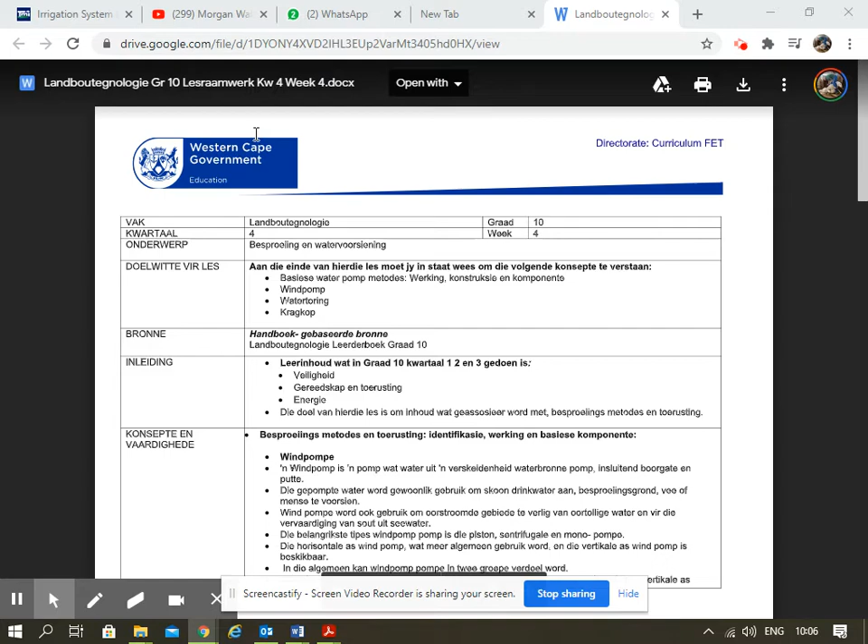Nou dit kom op die JOP's wat ek vir julle gestuur het, or in English the ATPs that we sent you, is the irrigation part. I helped create this one. It's nog 'n lekker enetjie to work with.

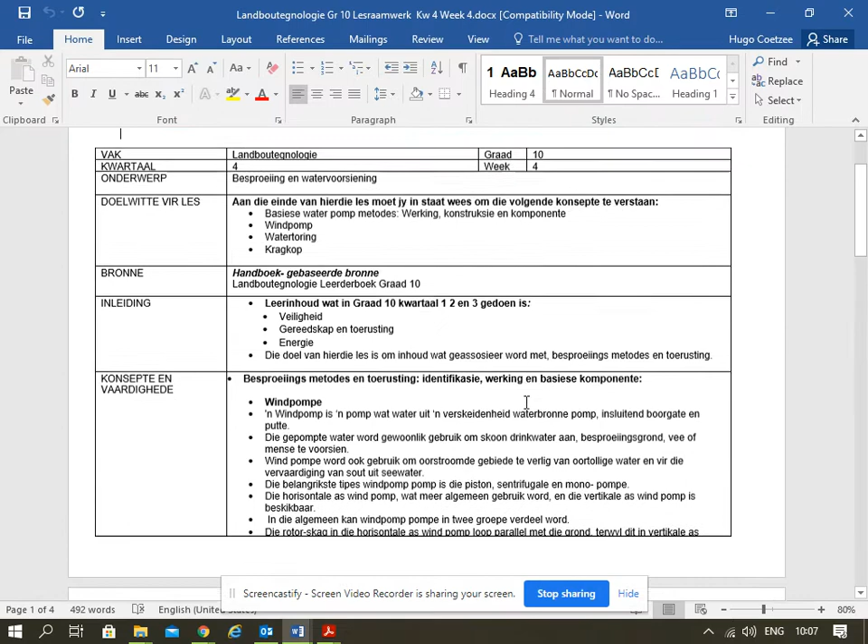So basic components for irrigation and equipment that we use.

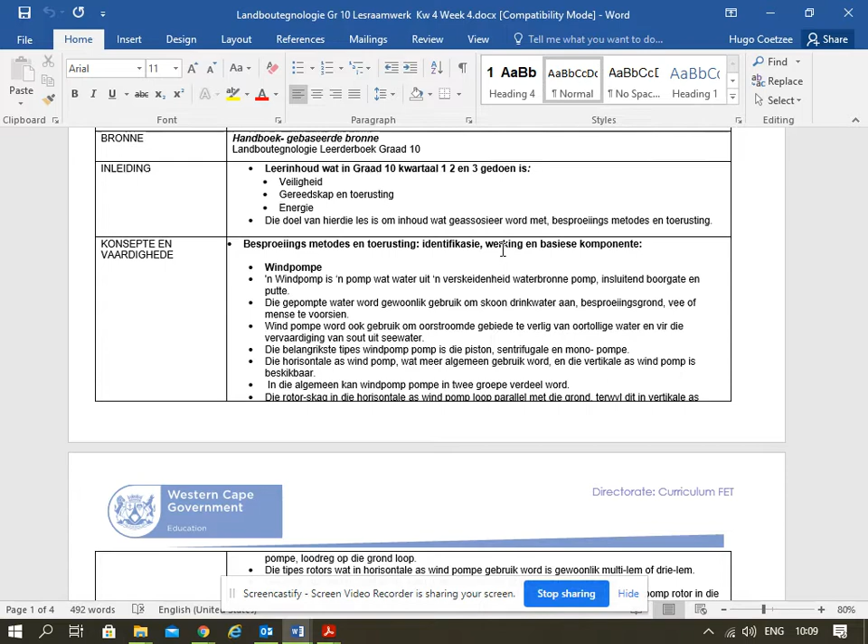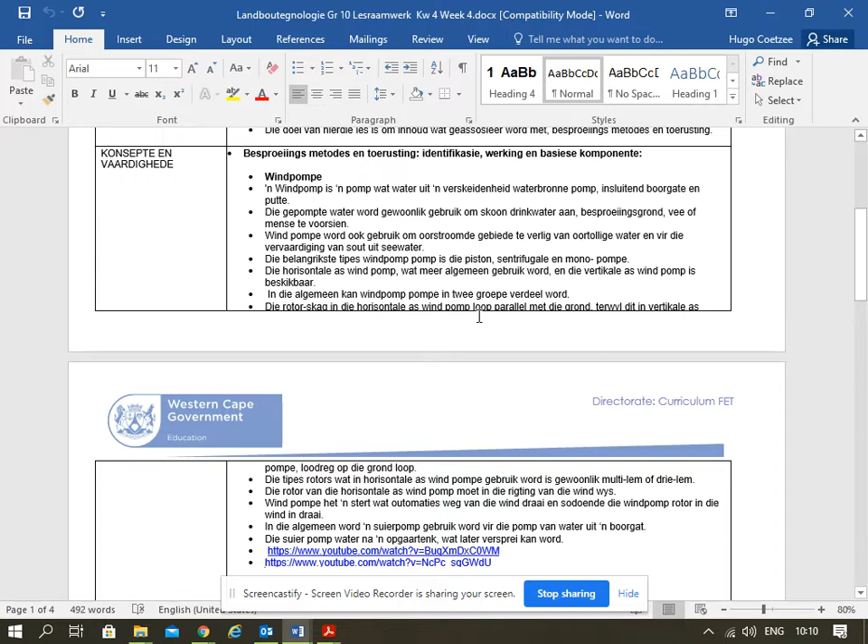So there's two types of windmills, one that goes horizontal and one that goes vertically.

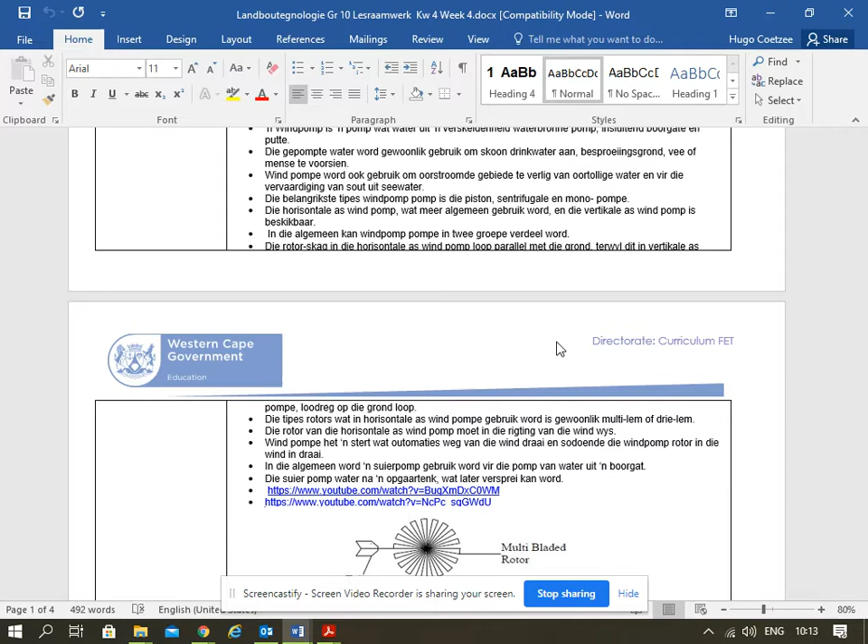So, we have a tail on a windmill that if the wind starts blowing onto the tail, it pushes the tail away, putting the blade into the wind.

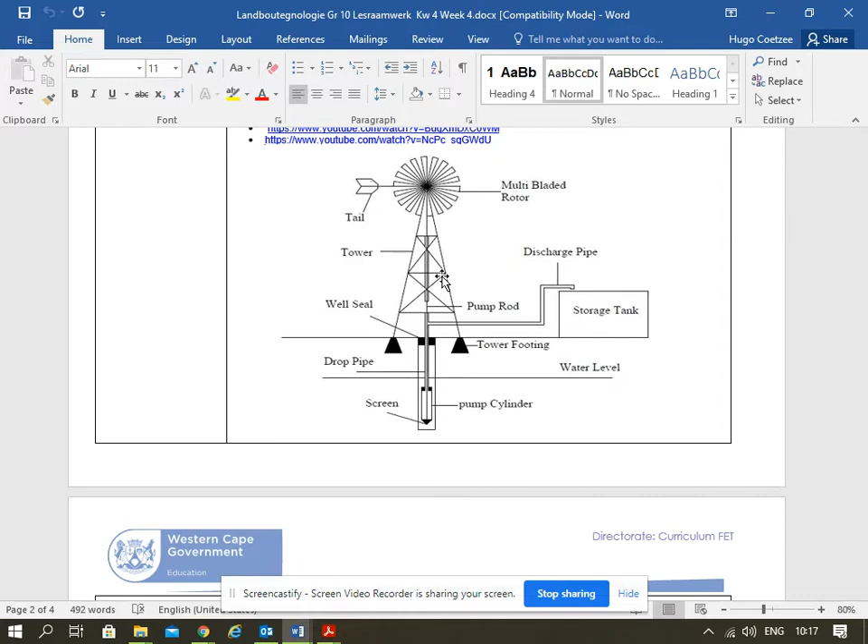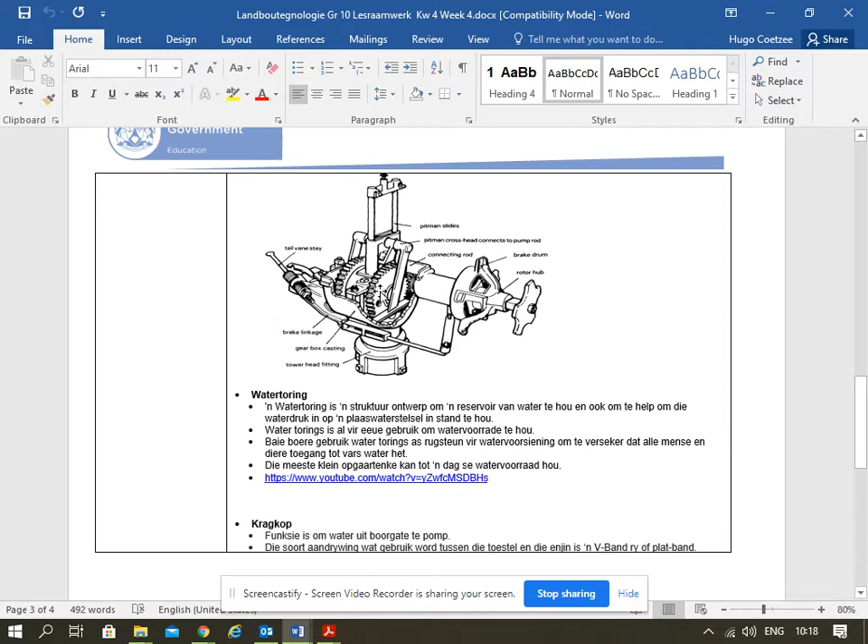There's the whole windmill system. That's how it works. The inside of the windmill.

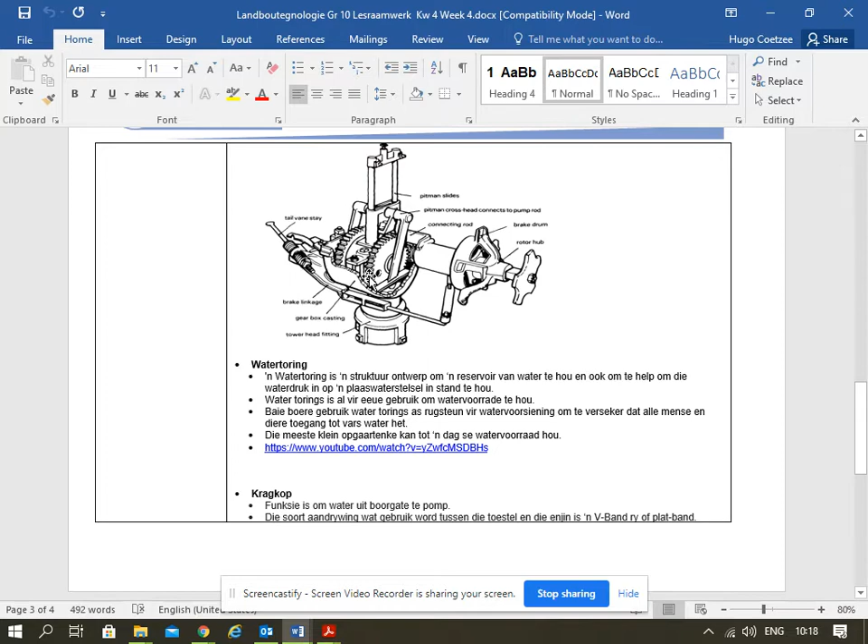Now, a water tower is basically built as a reservoir. It's usually very high up. But they have very small ones, right? It's like little reservoirs. You get little reservoirs, yes, but now a water tower's idea: if you're in a place where there's no water pressure, you have to use gravity. So if the water tower is 10 meters up, gravity will force that water down through the pipe to the other end.

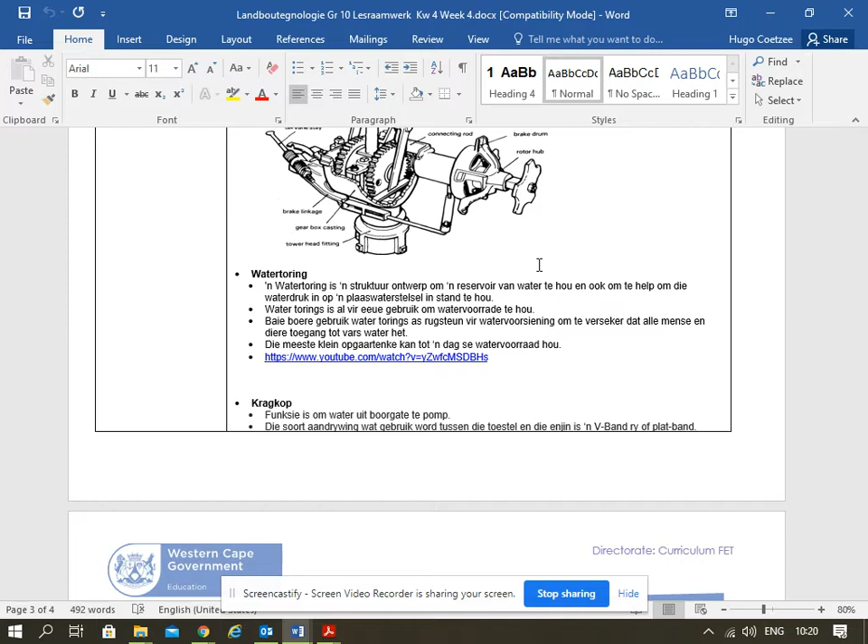So many of the small reservoir tanks, like the JoJo tanks, can have up to a day's water for a farm.

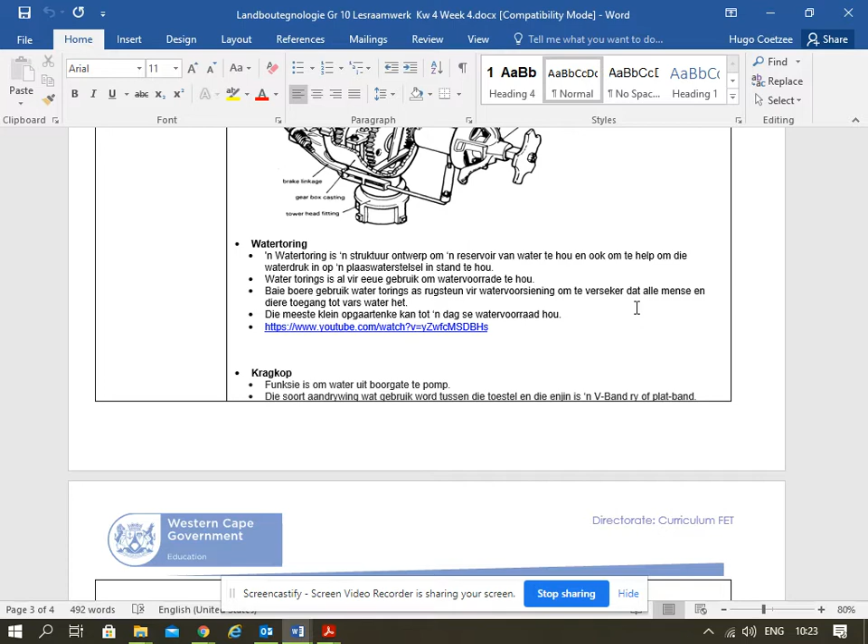So the kragkop, that pump that we use, is to get water from the borehole into the reservoir.

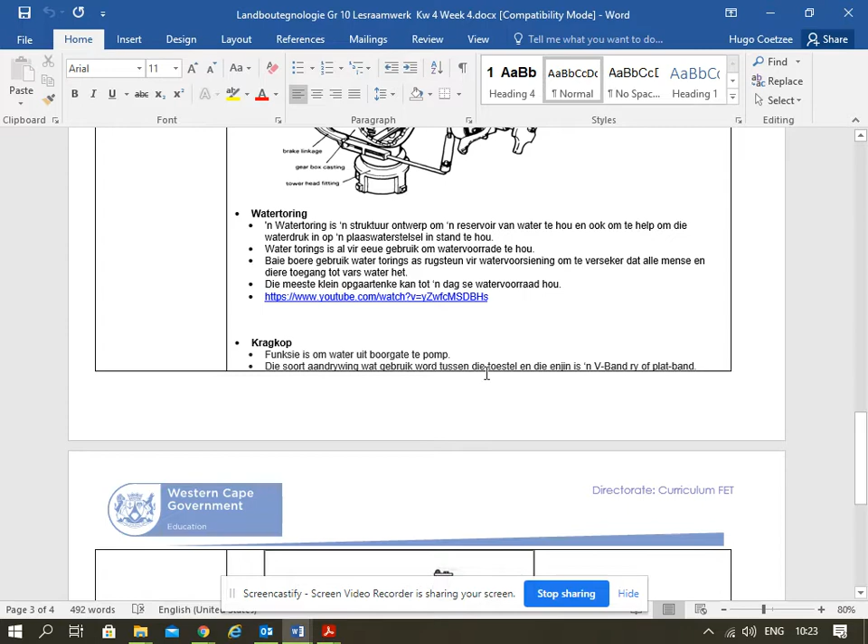And there is a picture of a kragkop. So there is the engine and there is the system. Arrow A shows the direction of rotation of the drive belt and arrow B shows the direction of rotation. So if A goes this way, B will be anti-clockwise. If A is clockwise, B will be anti-clockwise.

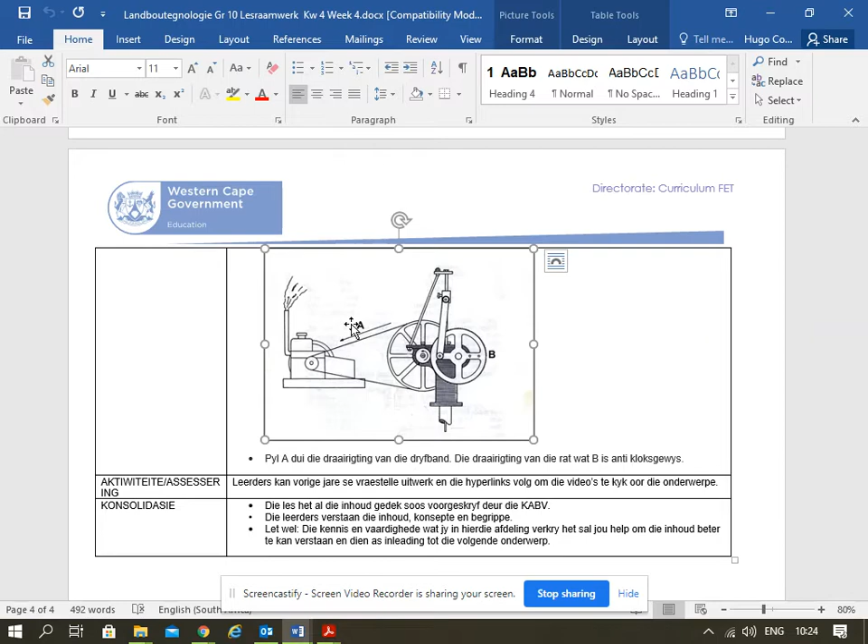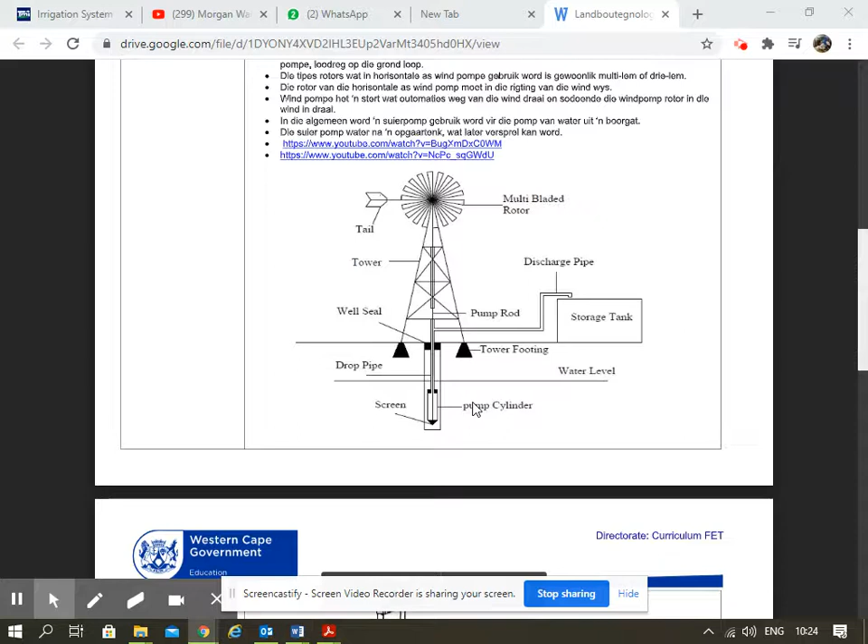Now every one of these ATP lessons has a hyperlink that you can click on that opens up a YouTube video that you can watch to explain more about our system.

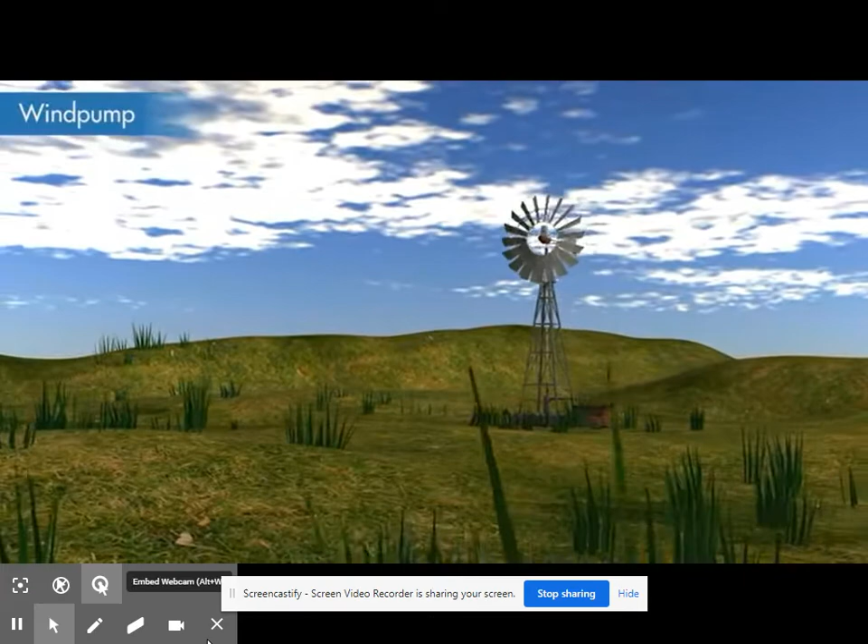A wind pump is a type of windmill which is used for pumping water. Hello viewers, this instructional video demonstrates the basic working mechanism of a multi-blade wind pump.

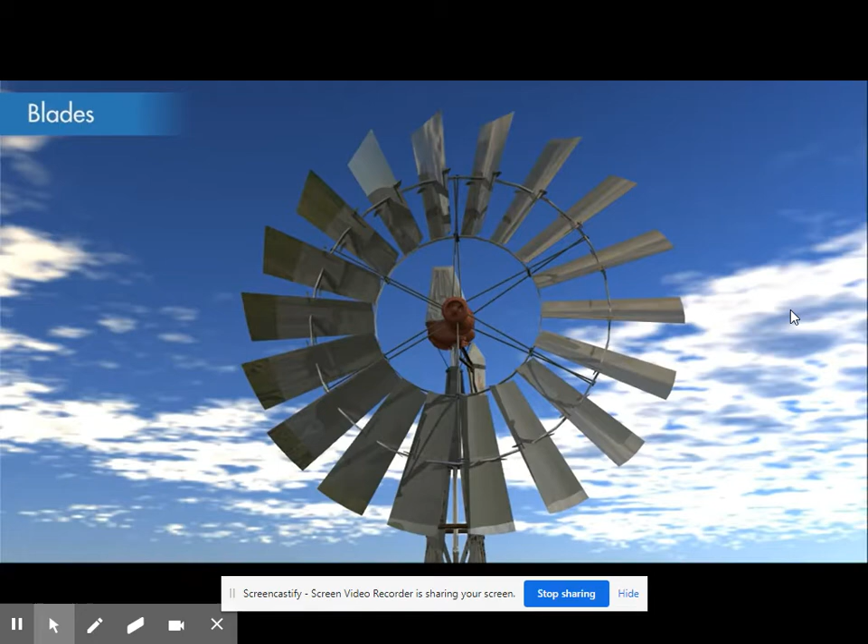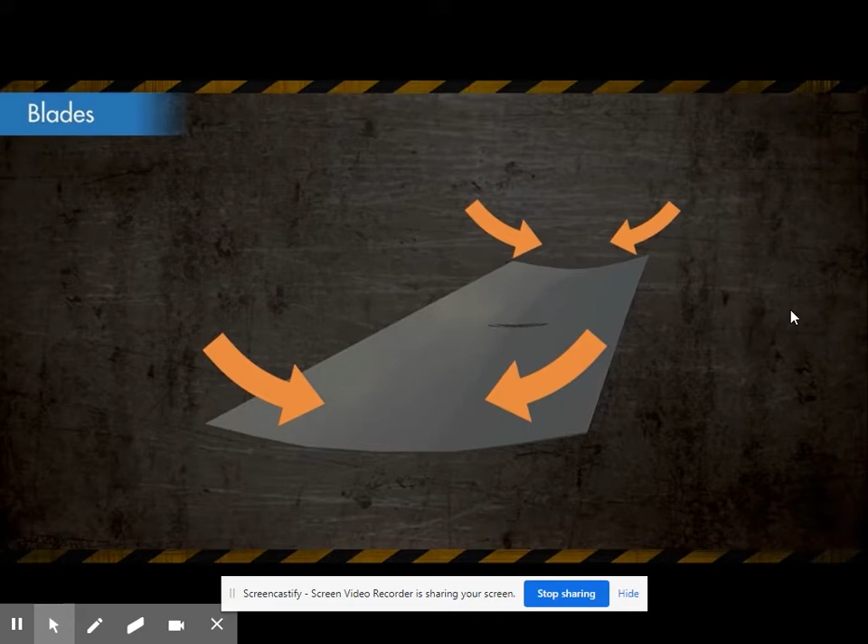Wind pumps are mainly comprised of 18 blades. The blades are slightly bent to an exact curvature to efficiently capture the wind.

A metal rib is fitted snugly to the blade and also has a tab that slots into the hole in the sail center, allowing the two sides to interlock. The metallic bands are fit through the ribs to assemble the sails together.

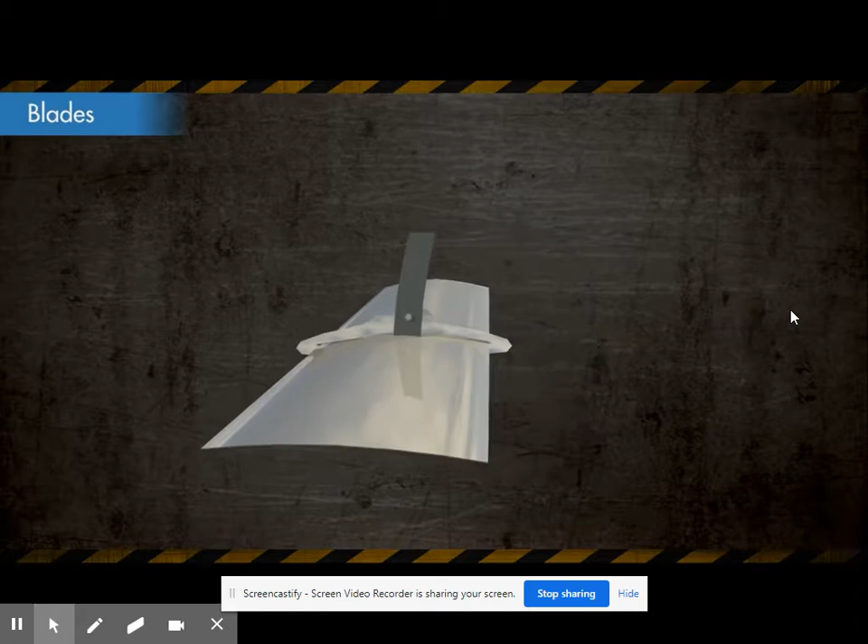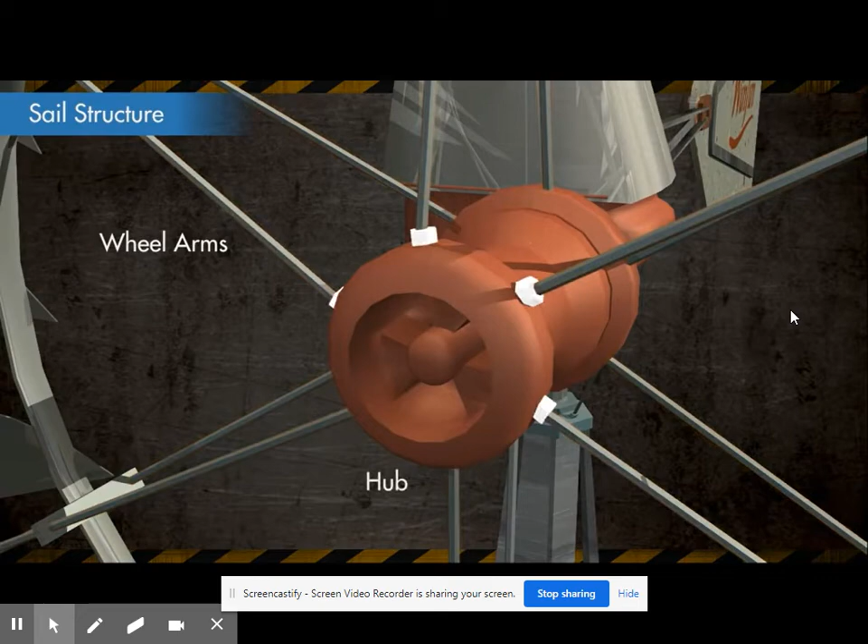The wheel arms that are screwed into the metallic hub hold the sails of the windmill. The sail structure is mounted on the wheel arms.

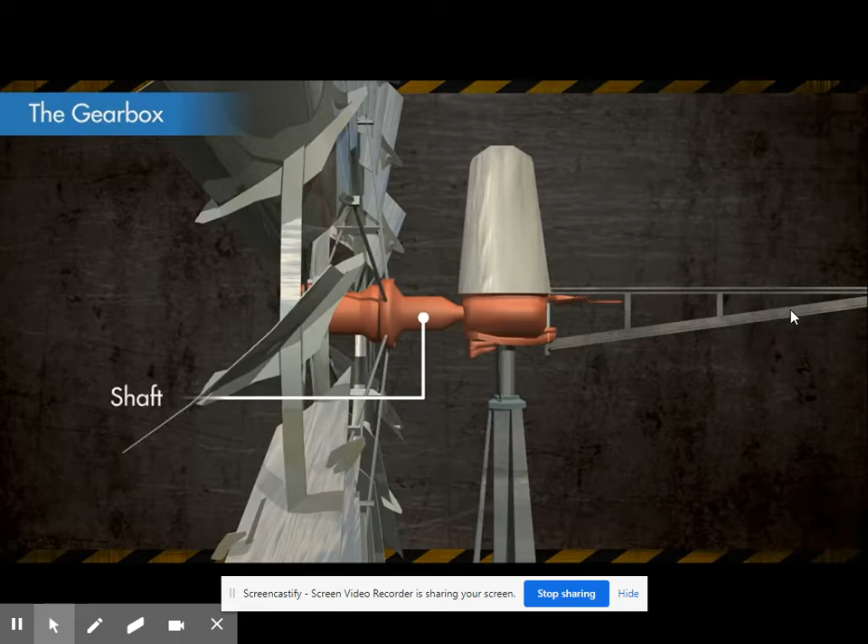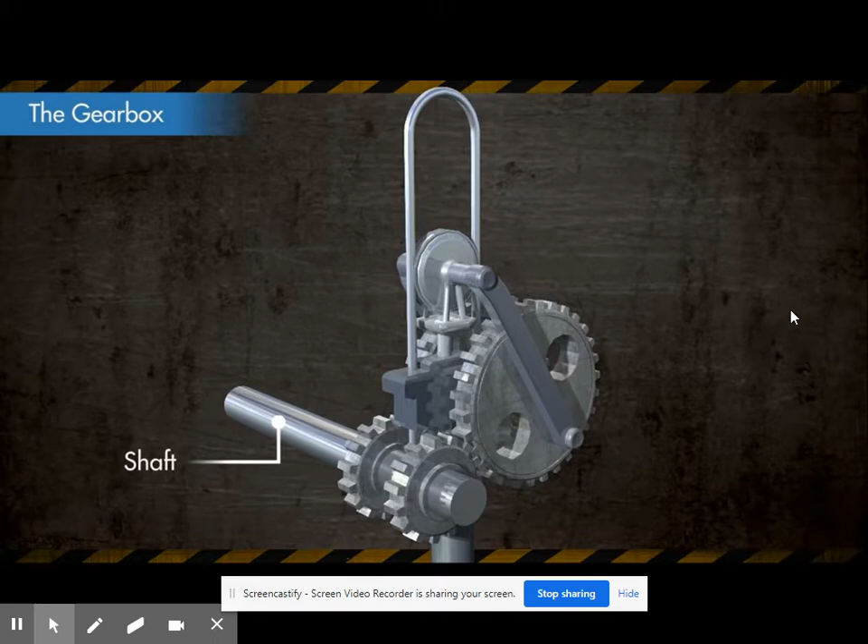The wheel hub is connected to a shaft that extends to the gearbox. The shaft, which is connected to the wheel hub, has two gears mounted on it in the gearbox.

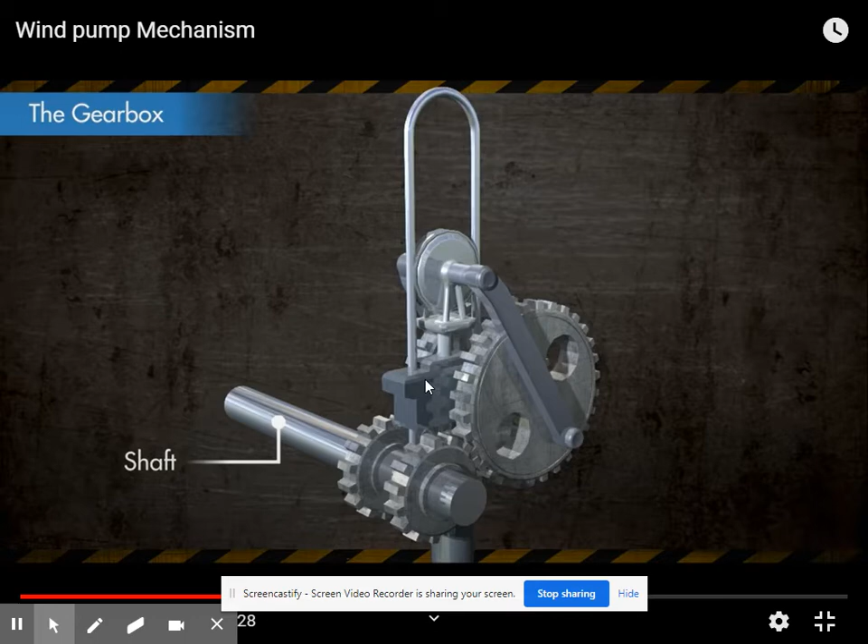As the gears rotate along the shaft, the bigger gears that are meshed to them rotate in the opposite direction.

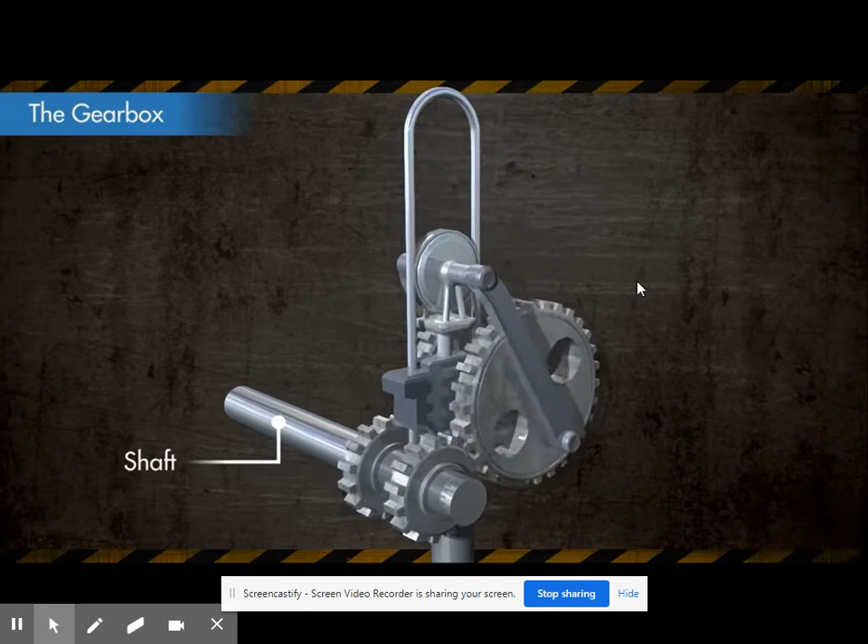The bigger gears are connected to a guide wheel by pitman arms.

The guide wheel is mounted on a pitman guide that allows it to slide up and down with the rotational motion of the connected gears.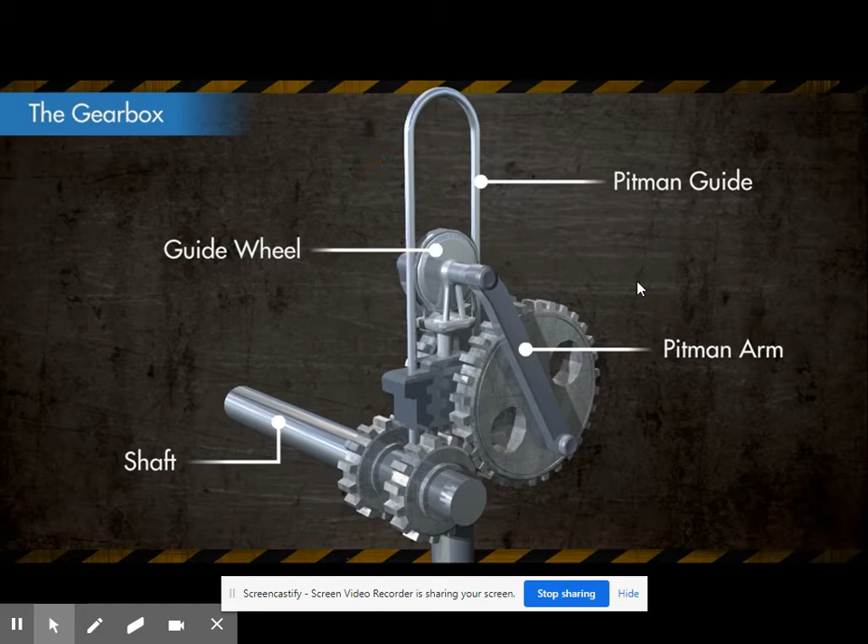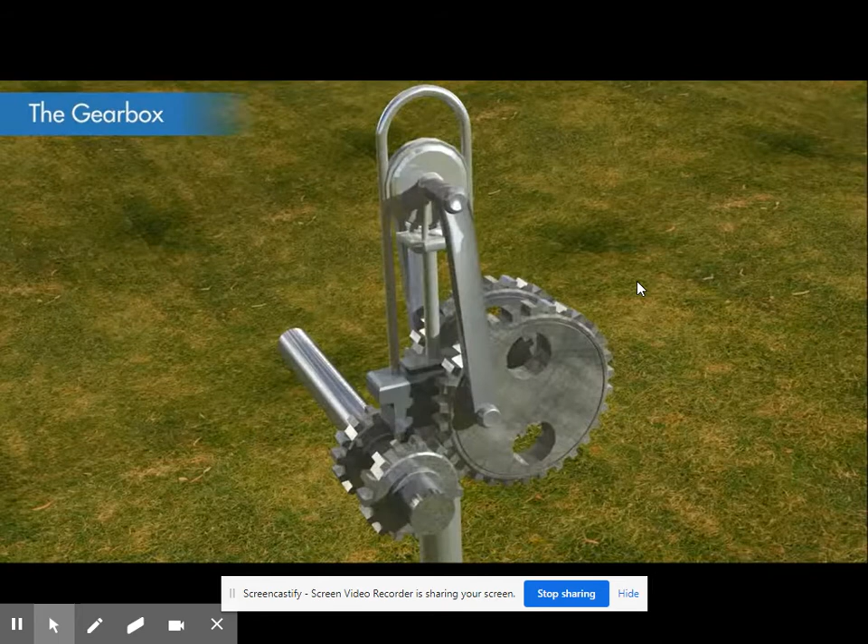The guide wheel is connected to a pump rod which is extended into the ground. The pump rod goes through a cylindrical drop pipe inside the ground.

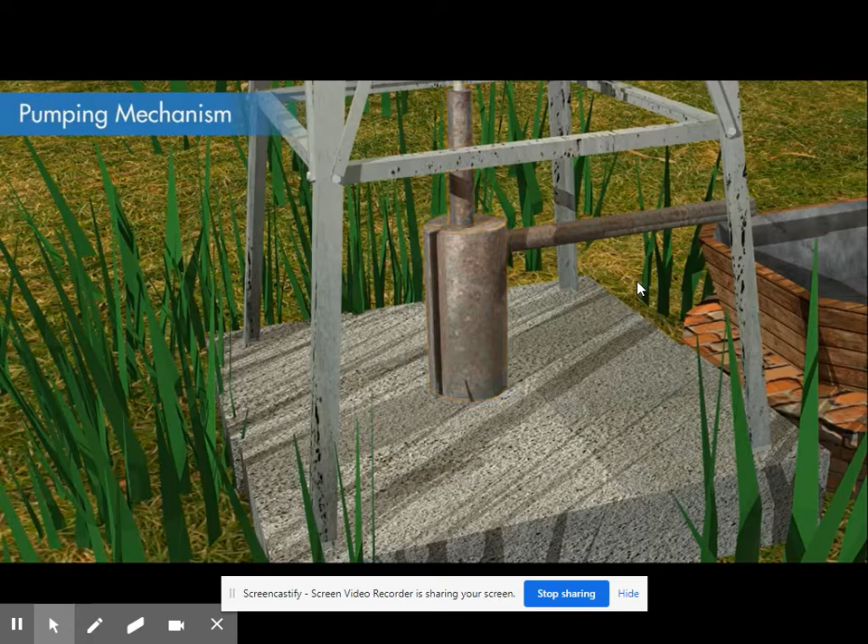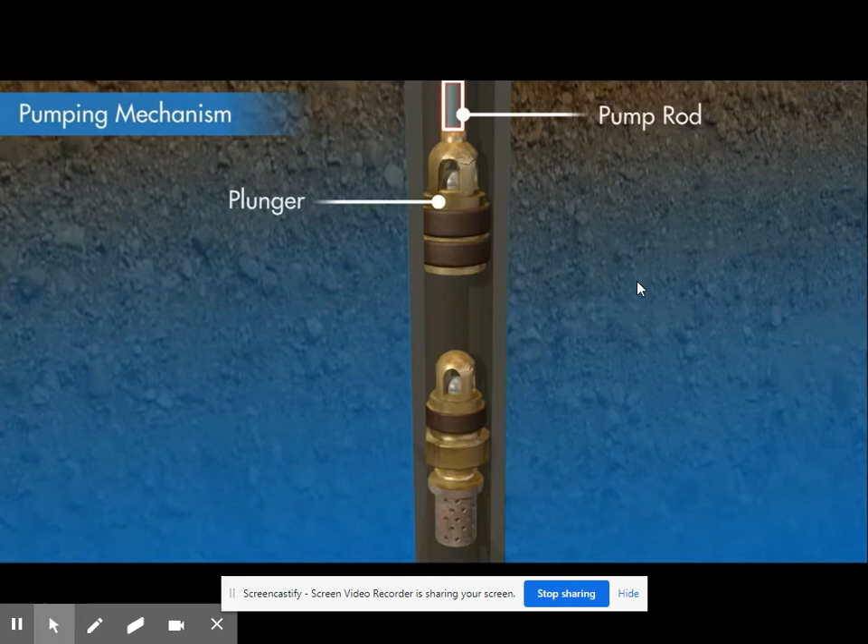The pump rod is connected to a plunger that acts like a piston and has leather cups to keep the plunger in direct contact with the cylindrical wall, and allows water to pass only through the valve when the plunger is making a downstroke.

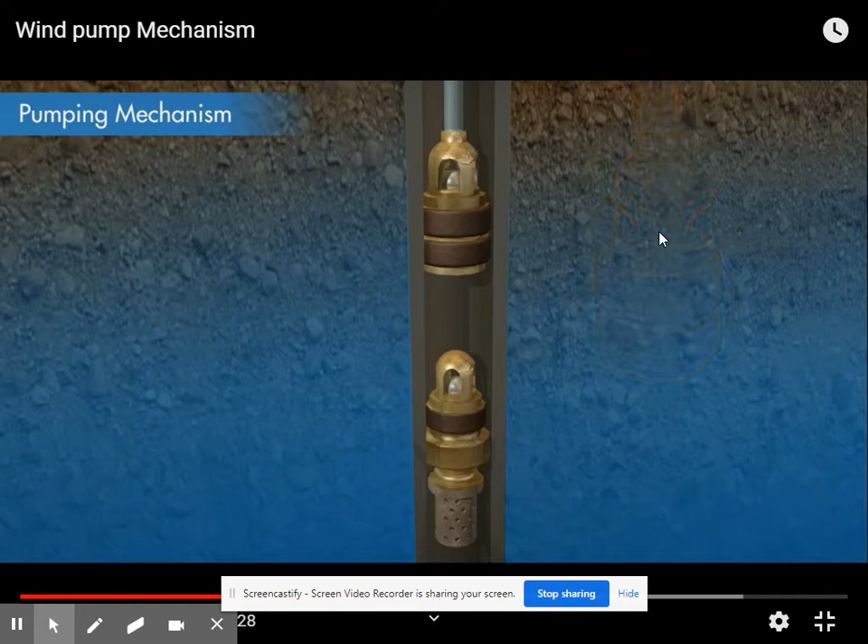There is a similar check valve at the bottom of the cylinder that is fitted to a strainer below the water level in the ground.

On a downstroke, water is held in the cylinder by a check valve and the plunger descends to the bottom, while the water passes through the plunger valve.

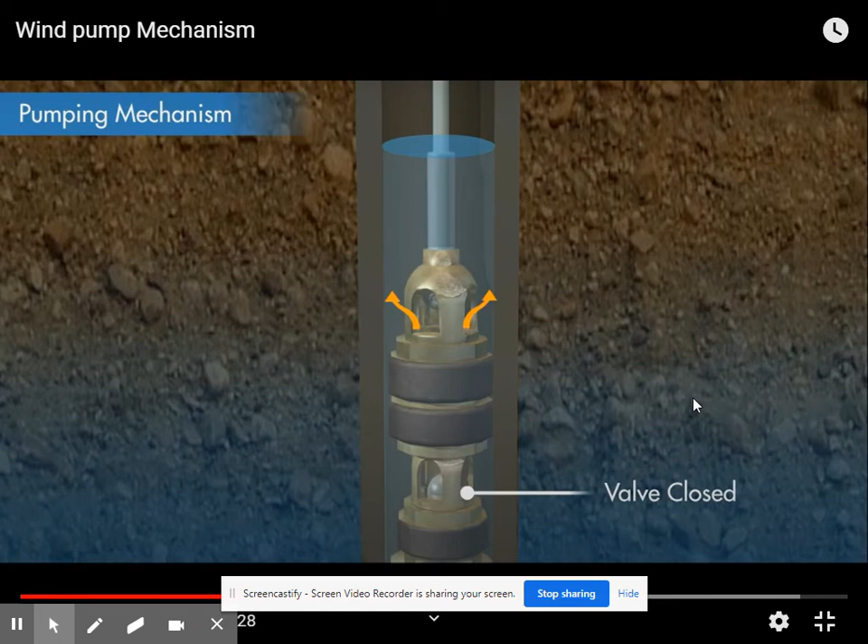Soos 'n basiese non-return valve. Die water kan nie terugloop nie. Water doesn't go back down, it only goes up.

The plunger forces a cylinder full of water into the drop pipe.

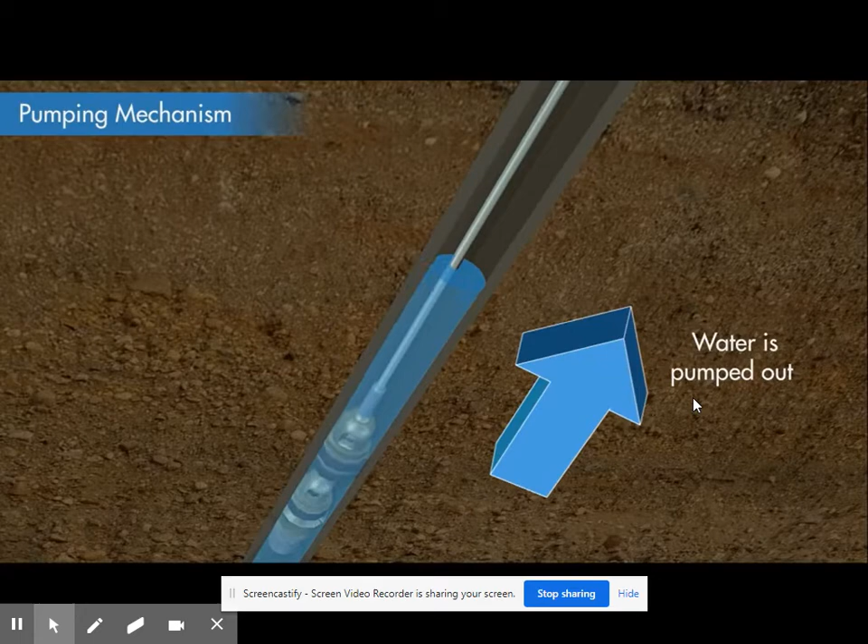And out to discharge tank, hence pumping the water out.

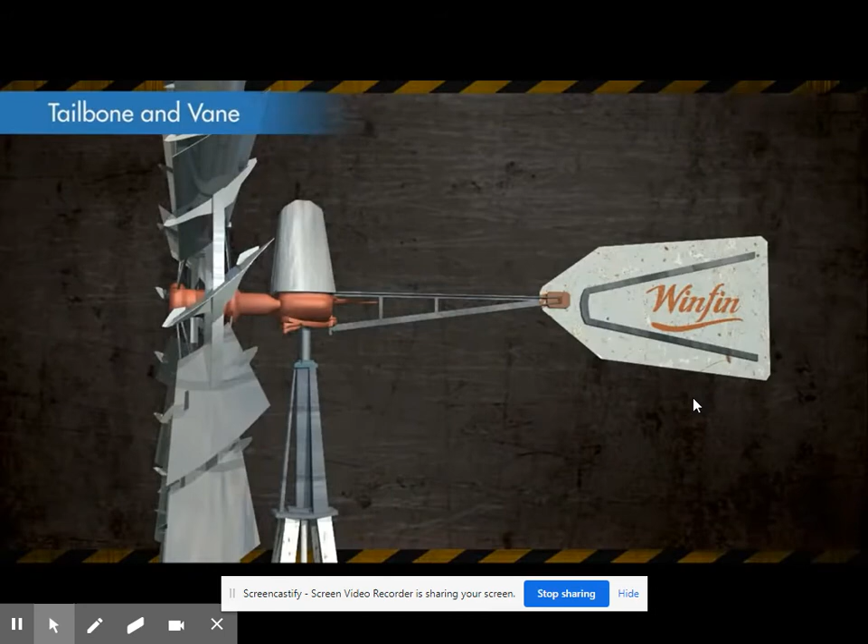The gearbox is mounted on a mast pipe and is also connected to a tailbone on which the vane is bolted.

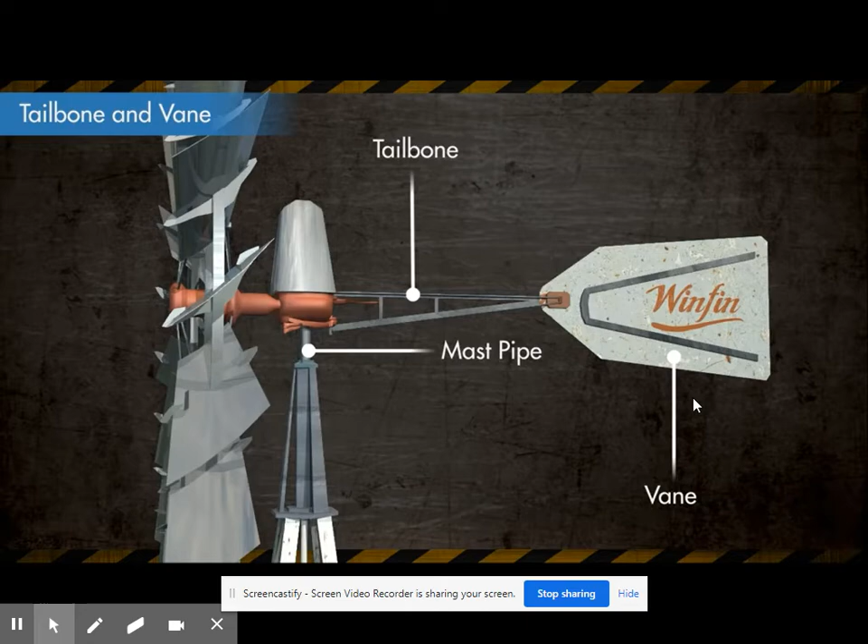The entire mill can revolve on the mast pipe, and the vane changes the direction of the mill according to the wind direction.

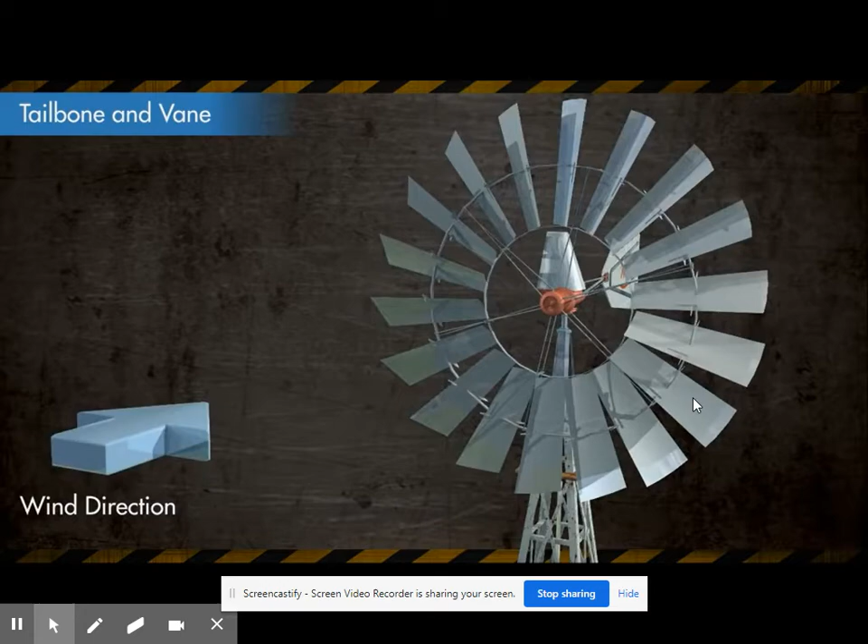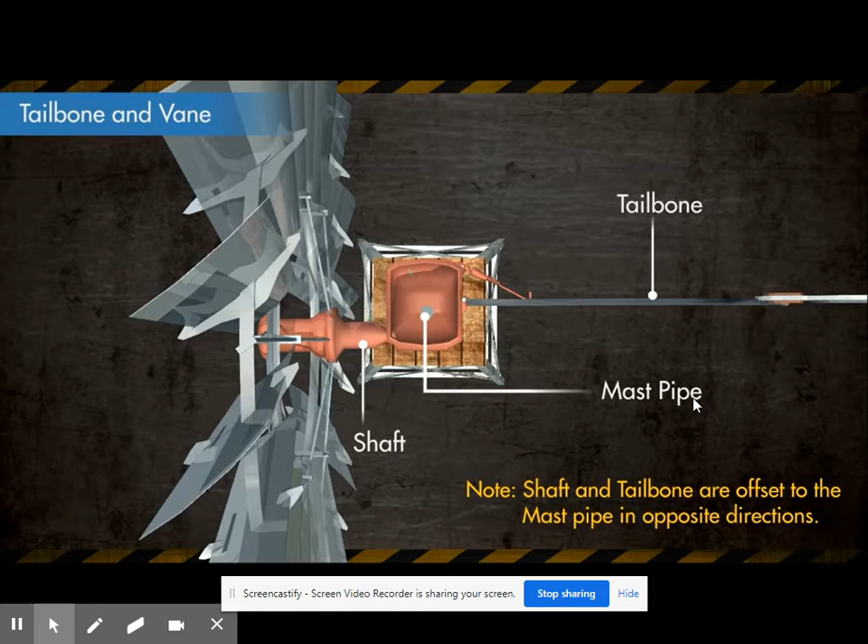Note that the wheel hub or shaft is offset from the mast pipe, and also the tailbone is offset on the opposite side of the mast pipe.

The gearbox has a vane spring attached to the tailbone.

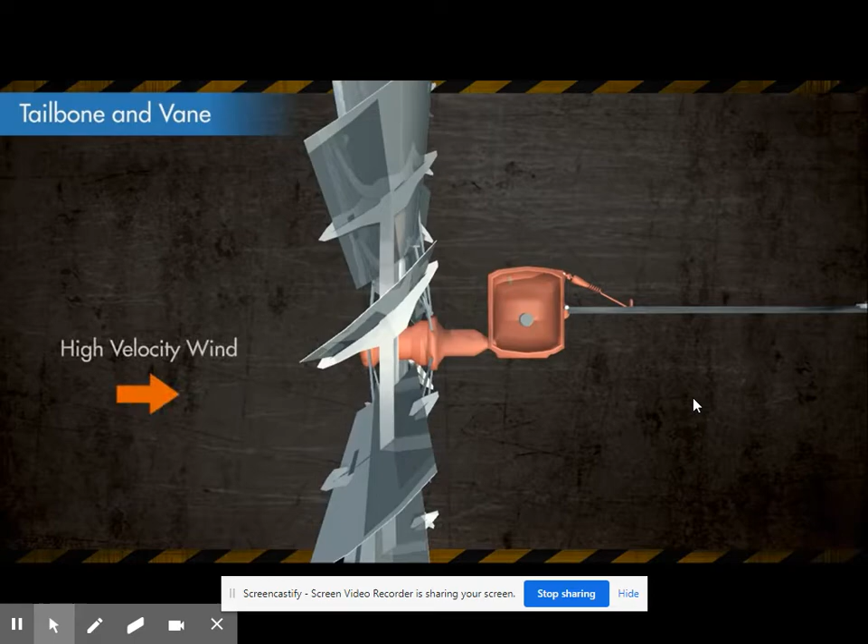In high wind conditions, the wind force furls the mill counterclockwise, pivoting the mill on the mast pipe, whereas the tailbone becomes parallel to the wind direction.

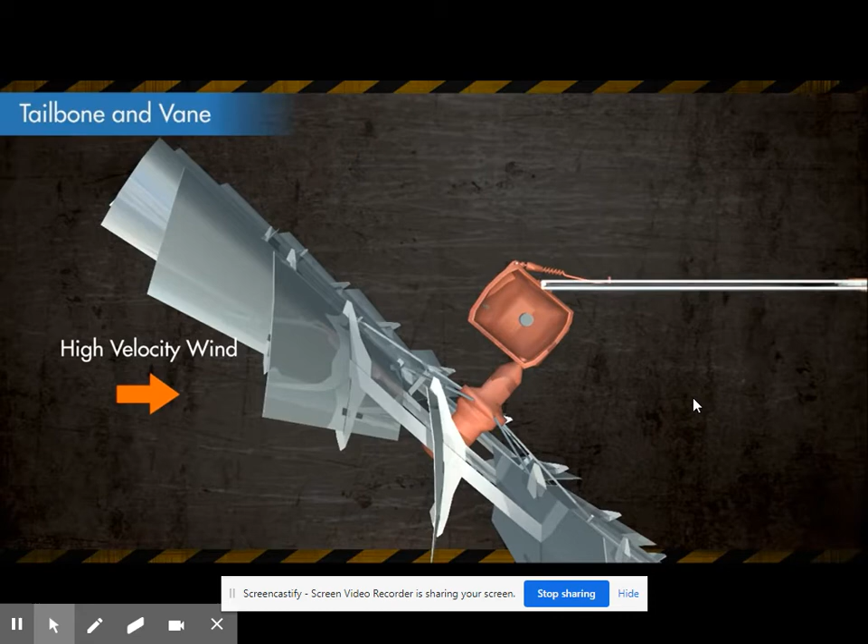The tension on the vane increases as the mill is furled and holds the mill into the wind at higher wind velocities.

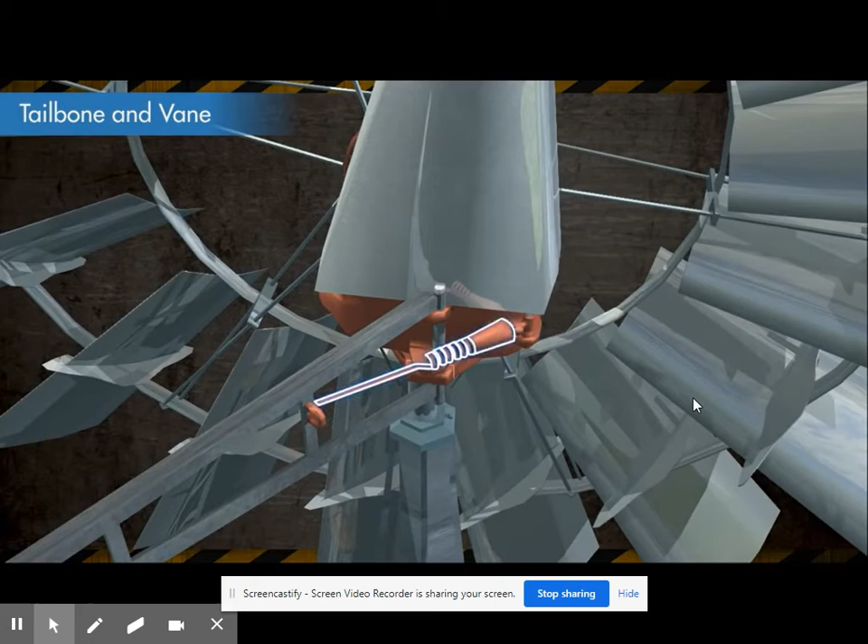The increased tension on the spring causes the wheel to return into the wind when the wind velocity decreases.

Wind pumps have been used since the 9th century, used extensively for irrigation purposes, and provide water as free as the wind.

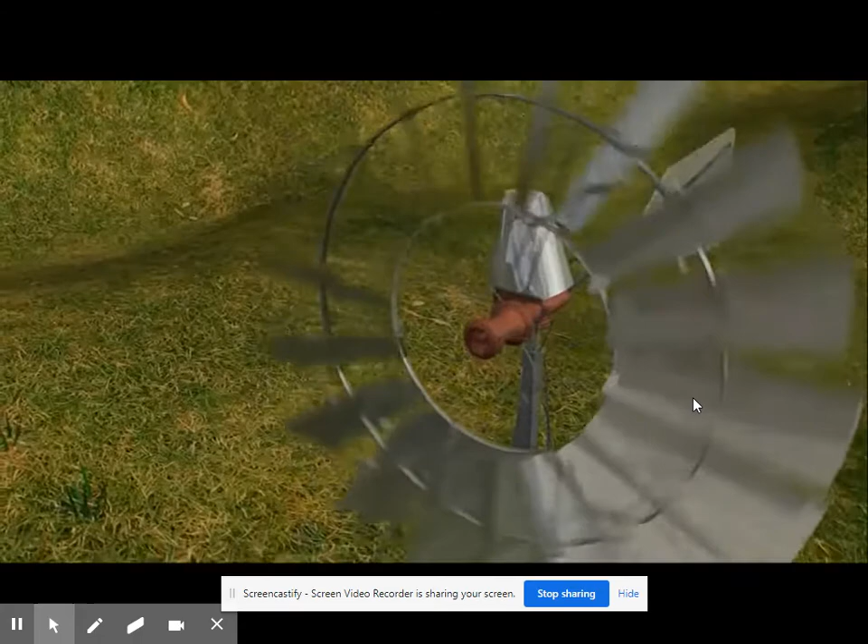Thank you for watching.

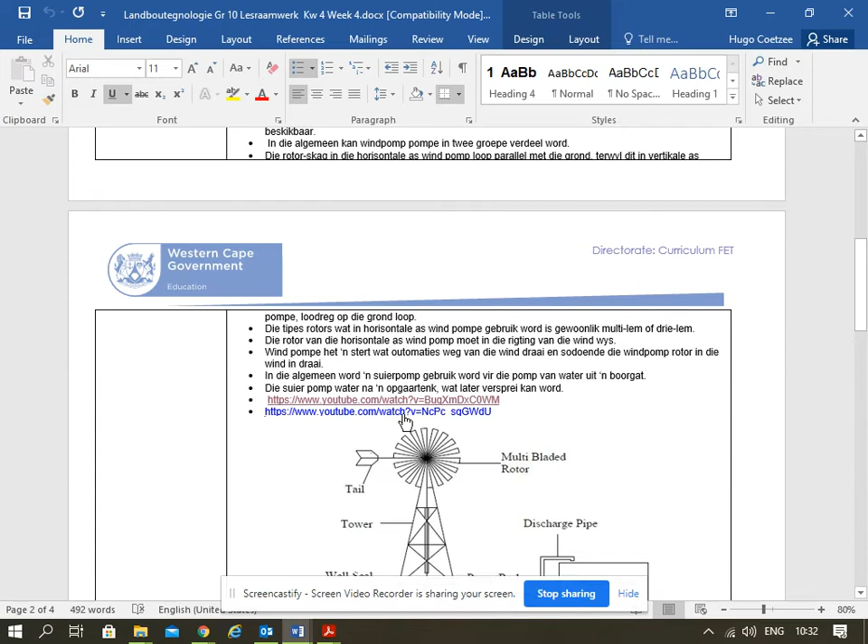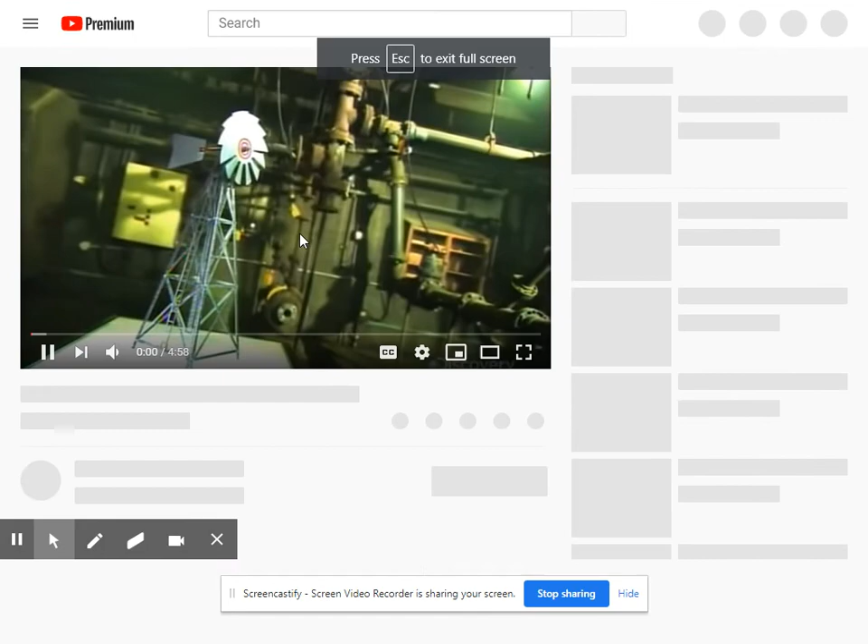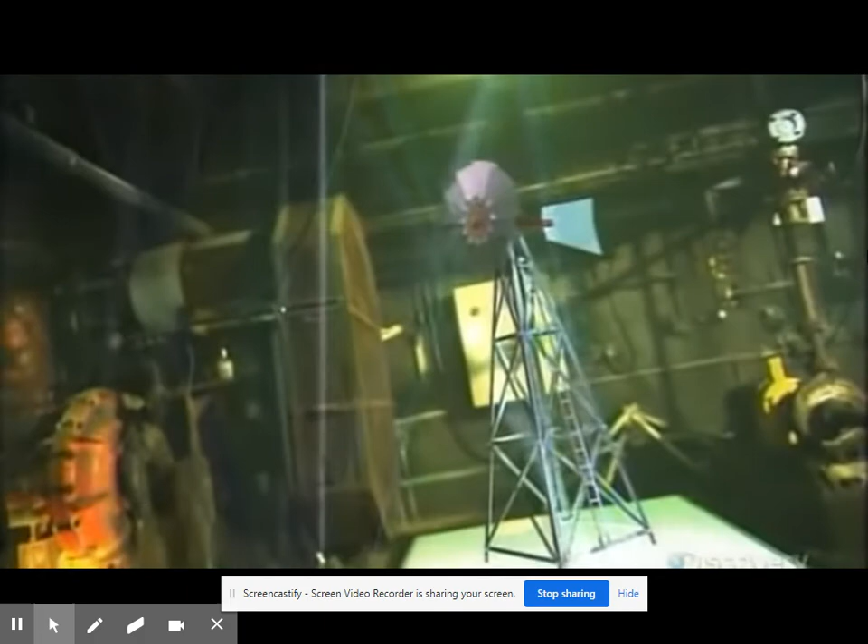To pump water from the ground, the windmill reaches to the sky. The blades catch the breeze and spin, while gears convert the spinning action into pumping action. This technology has been around for over 2,000 years. The first known water pumping windmills originated in Persia around 700 AD.

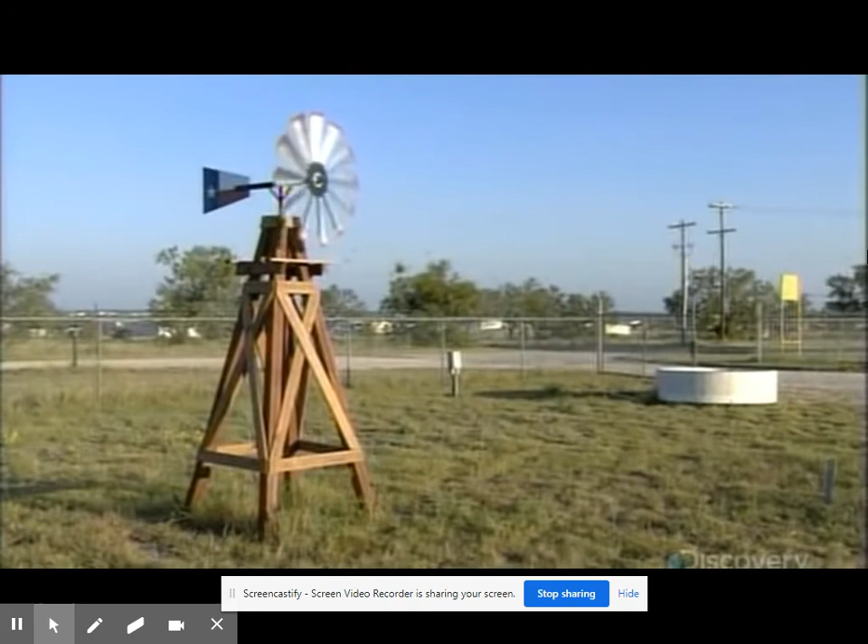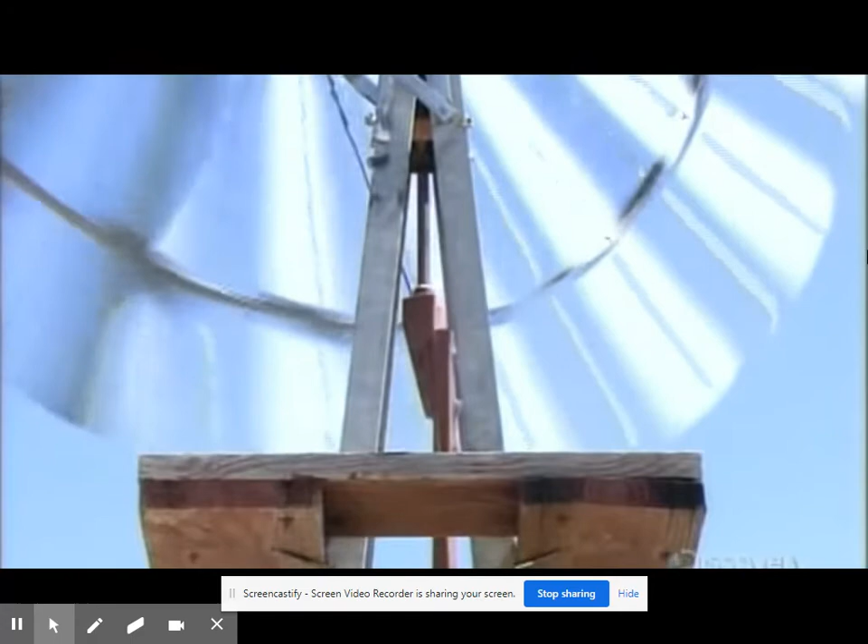In 19th century America, this was the wheel of progress, a metal-bladed windmill that turned with greater force than traditional wooden ones, even in low wind conditions. Its superior pumping capacity made it indispensable to pioneers settling inland, away from rivers and streams.

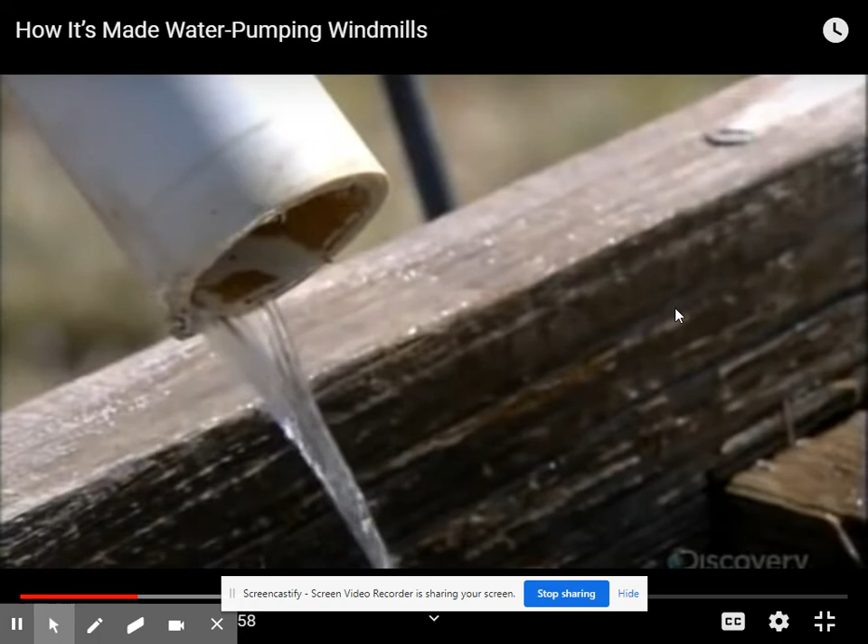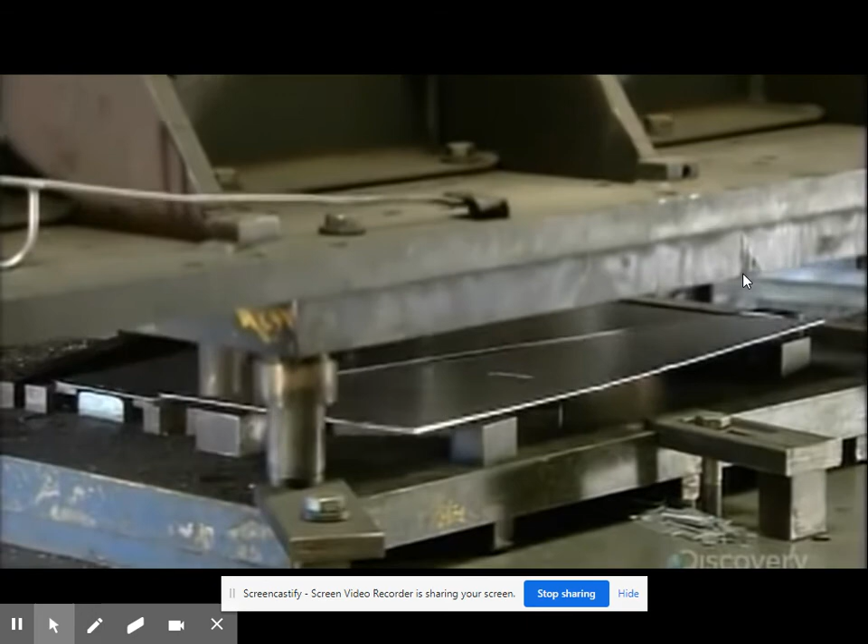Will be a windmill sail. They'll need 18 for each wind wheel. Once stacked, they transfer the sail shapes to a rolling station.

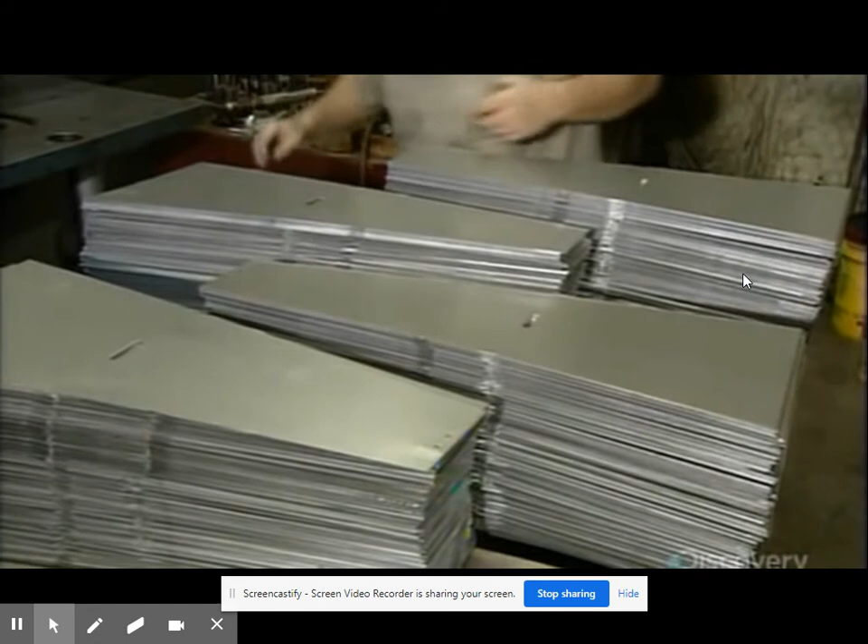The roller bends the steel to an exact curvature, producing a slightly bowed shape, which will efficiently capture the wind.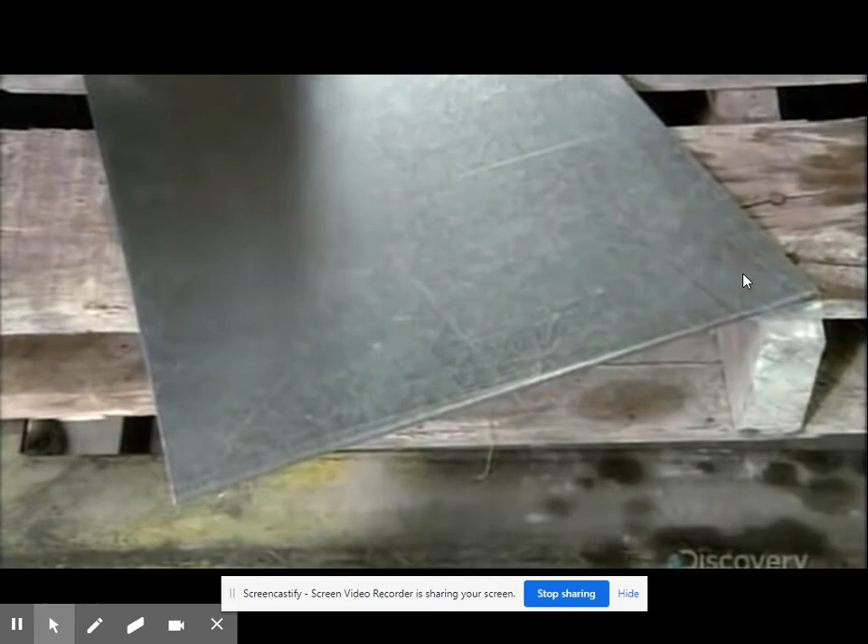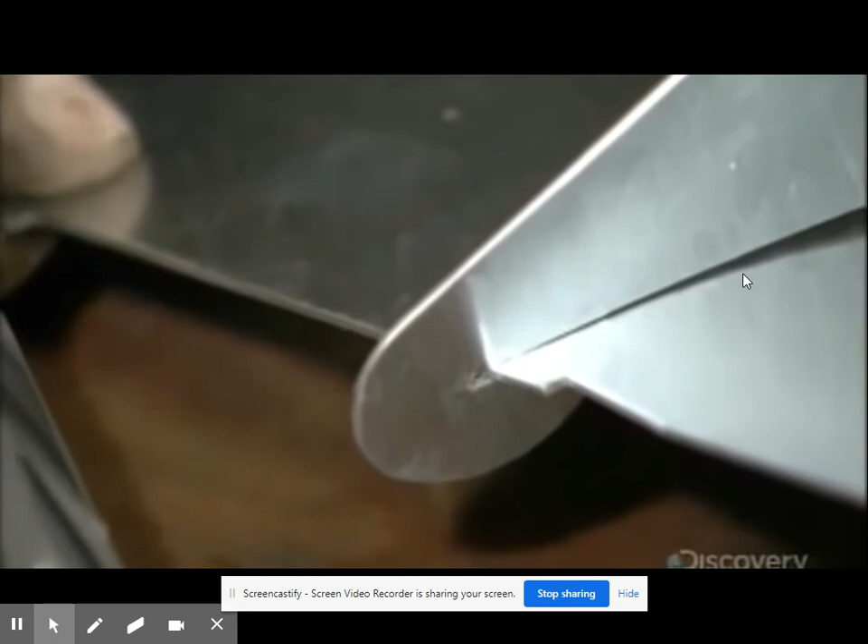Next, a worker wraps a metal rib around each sail. He taps the sides until it fits snugly to the sail. The rib has a tab that slots into the hole in the sail's center, allowing the two parts to interlock.

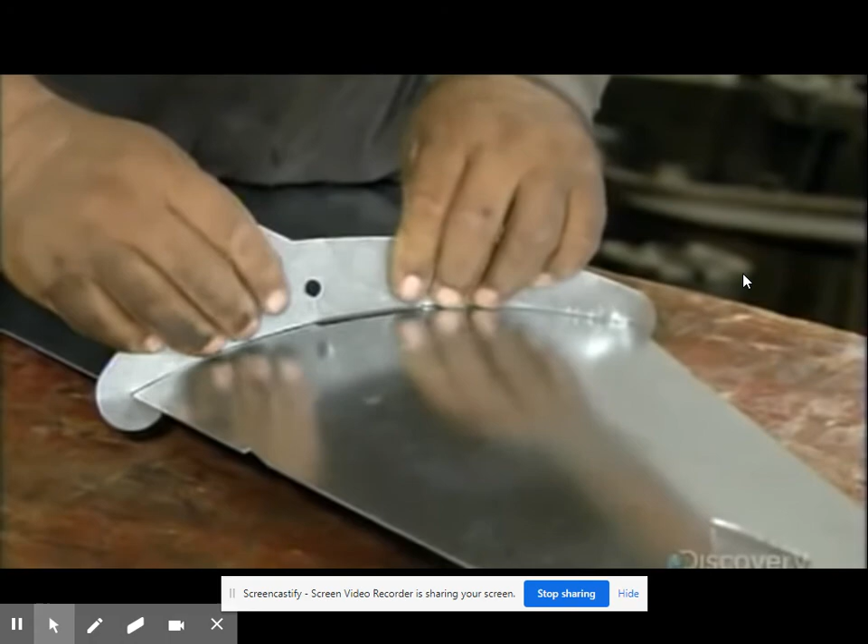Bands fit through the ribs to assemble the sails in groups of 3.

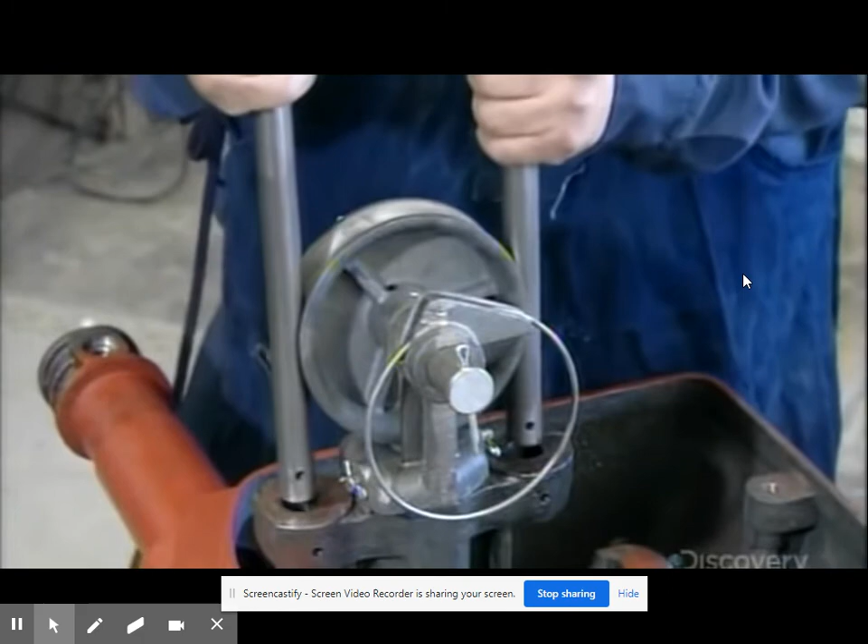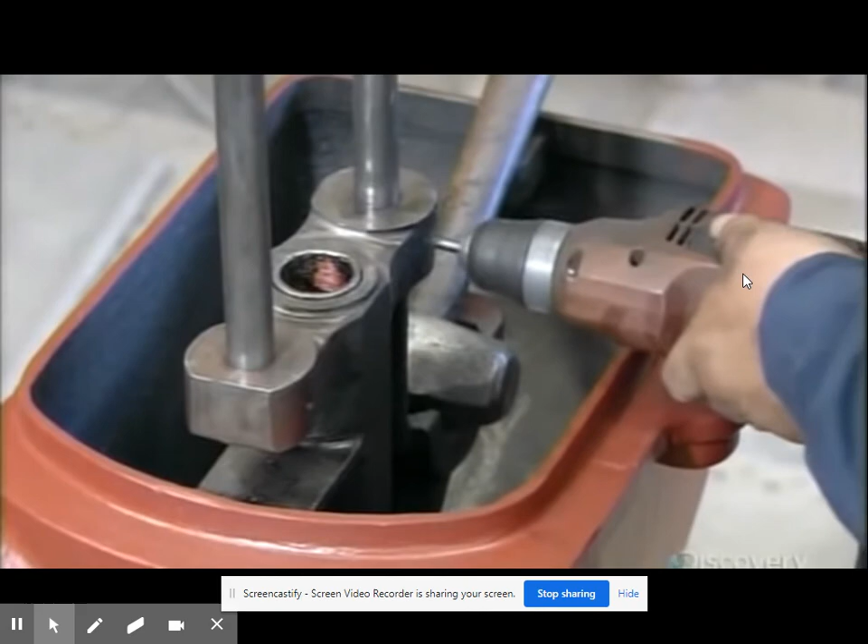Next, he inserts the wind wheel hub and shaft into the main assembly. It's interesting, you drive past this stuff and think to yourself, old technology, but look how much effort goes into one of these.

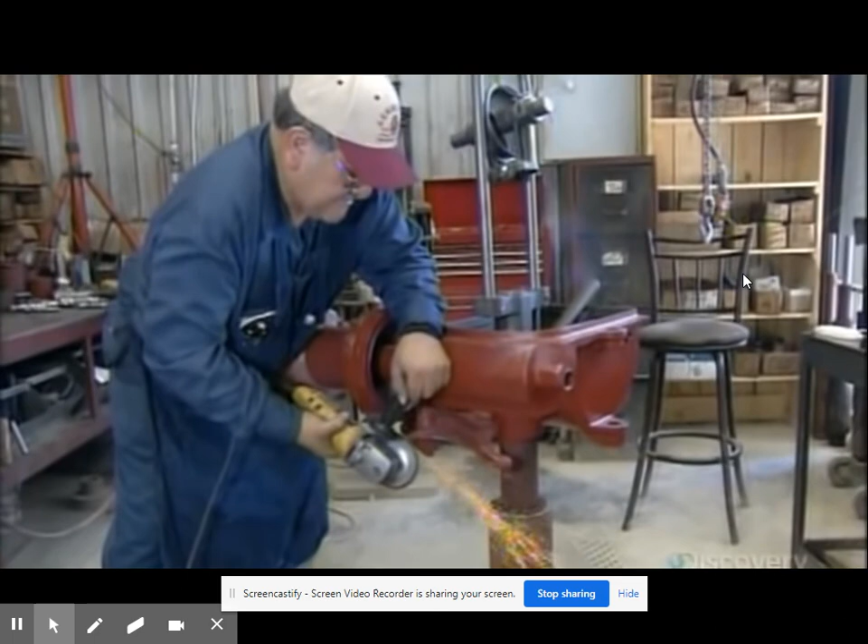He then grinds the brake lever to shape it to the brake mechanism on the hub. This braking system is critical. It will stop the wind wheel from spinning out of control in high winds.

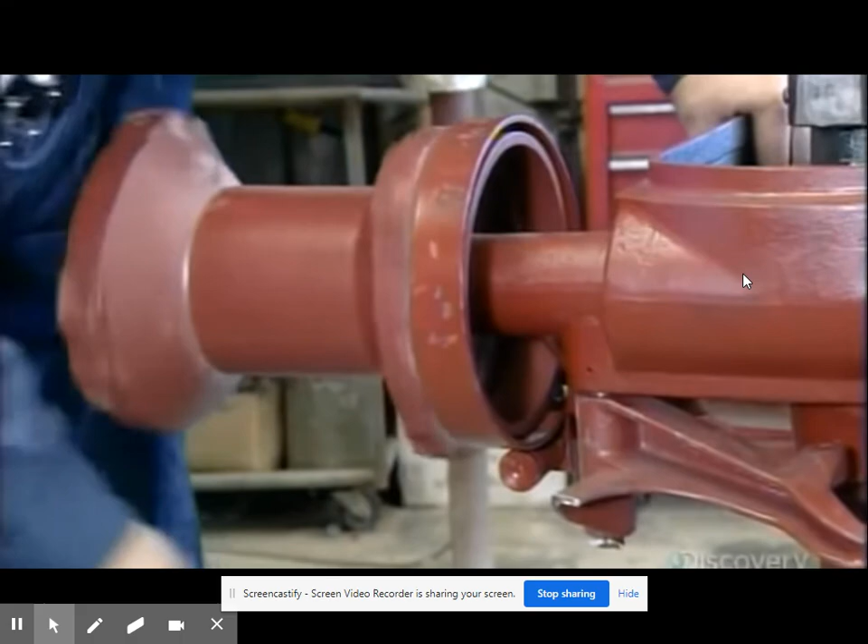He spins the hub and activates the brake several times to confirm that his machining is dead on and that the brake system works perfectly. If it doesn't, he makes adjustments.

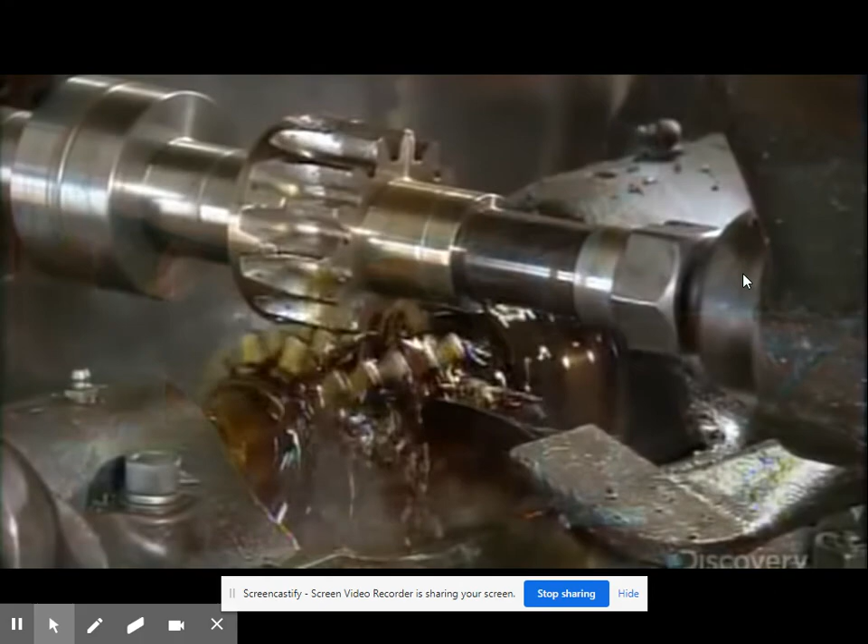Next, using a very toothy circular cutter, he carves grooves into steel blanks to shape the gears. The difference is quite obvious.

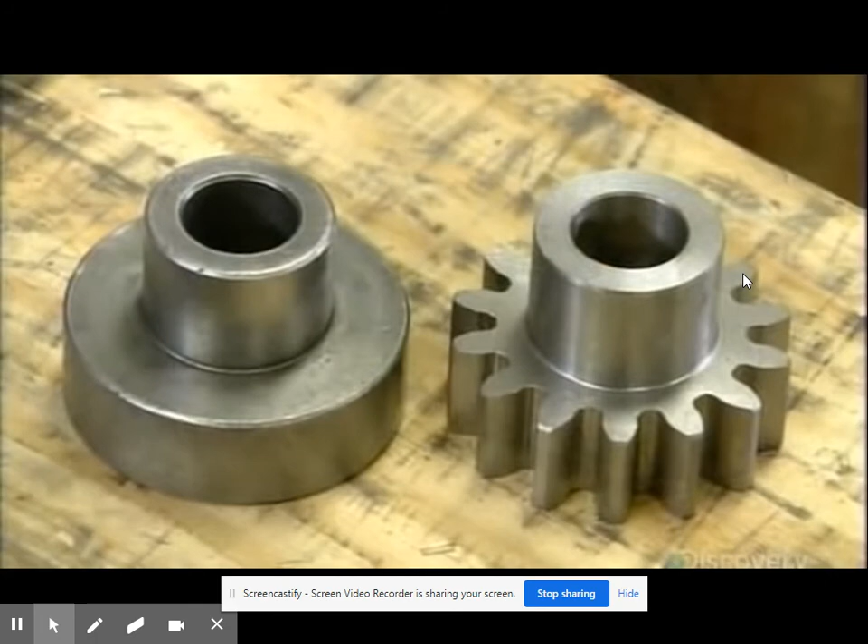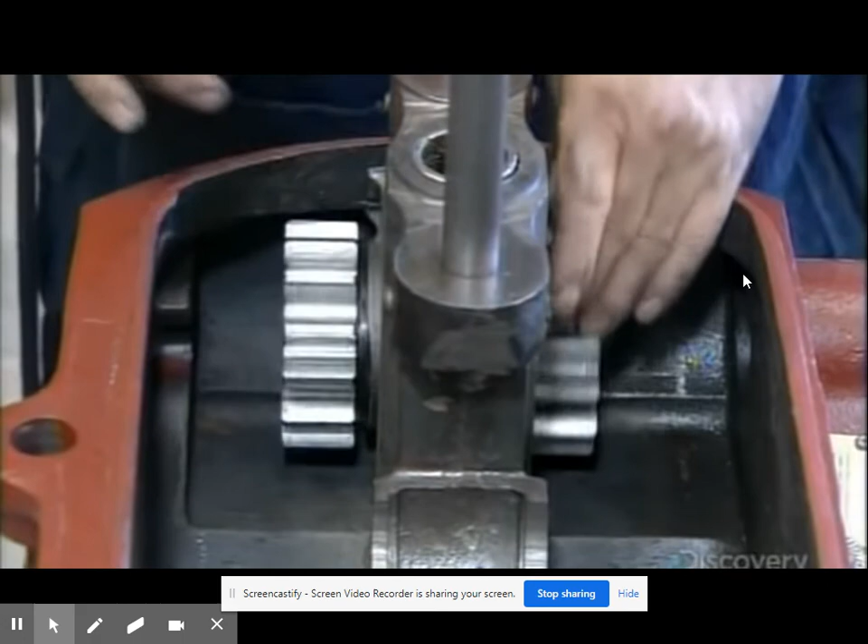He installs a set of these gears at the base of the metal loop and secures them with a metal pin. He checks their turning radius, then mates a larger set of gears to the smaller ones, ensuring that the teeth intermesh. This very substantial gear system will drive the guide wheel, creating the pumping action.

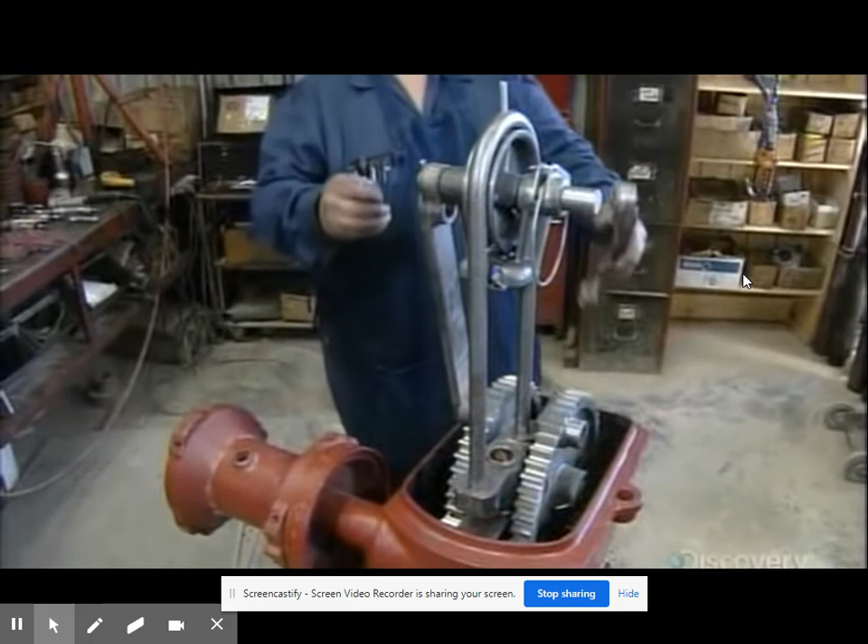Two metal parts called pinion arms link the gears to the guide wheel. A steel pin holds everything together. As the gears turn, the guide wheel rolls up and down the loop to complete a pumping cycle.